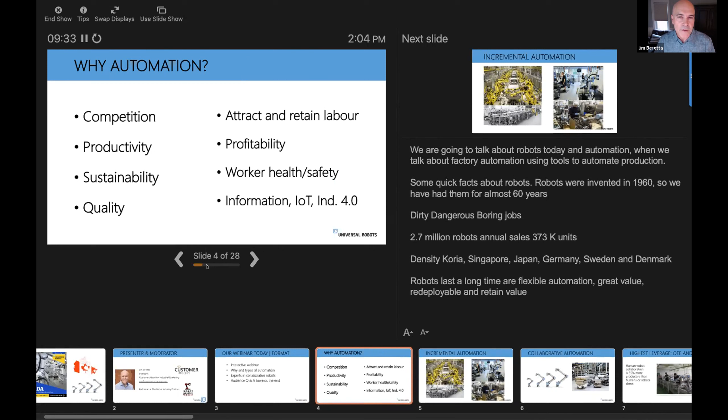One of the conversations that I'm having recently with a lot of clients and in the industry is about attracting and retaining labor. And we're going to talk about this as kind of a current theme through the presentation.

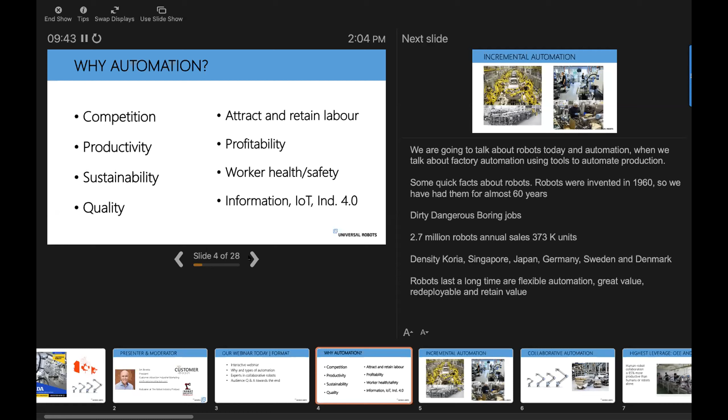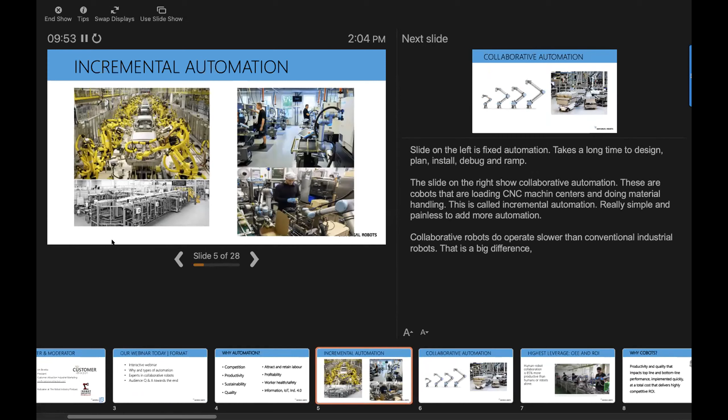Hi, Jim, sorry to interrupt. I just want to let you know that your view, we're seeing the notes screen. So if you just want to change to slideshow, we should all be able to see the slide. Okay, thank you for that. I'm seeing the other one, so I am. If you just go to swap, maybe swap displays, it could be that. Swap displays is how we're going to do this.

Yes, thank you, perfect. Great, so we're going to skip ahead a couple of slides. And this next slide that I'm going to show you, the slide on the left, this slide's about incremental automation. It takes a long time to design, plan, debug and ramp hard automation. It takes a long time to design it, it takes a long time to install it. So that's the slide on the left.

The slide on the right is showing lean automation or collaborative automation. These are pictures of robots that are loading CNC machines, and the one at the bottom looks like it's doing a material handling job. When we're talking about incremental automation, the interesting thing about collaborative technologies is that it's very simple to add more automation.

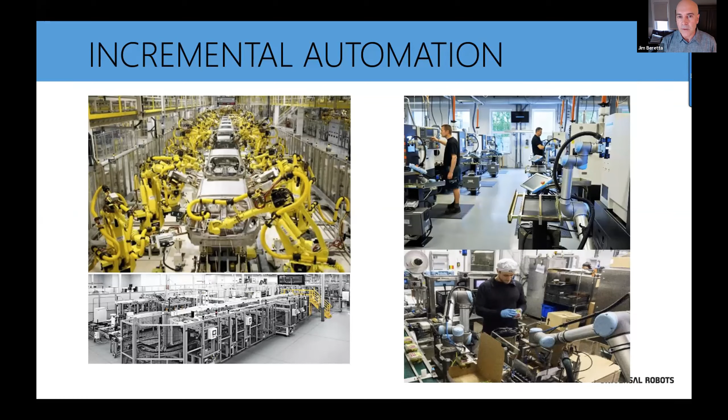So you just add it when you need it. If you have another CNC machine, you can add another collaborative robot. And this is in days and weeks, not months and months, which is on the left-hand side of your screen.

So here's two examples of collaborative automation. On the left-hand side are Universal Robots robots. They're simple, they're elegant, they're easy to use, and they're divided usually by reach and by weight.

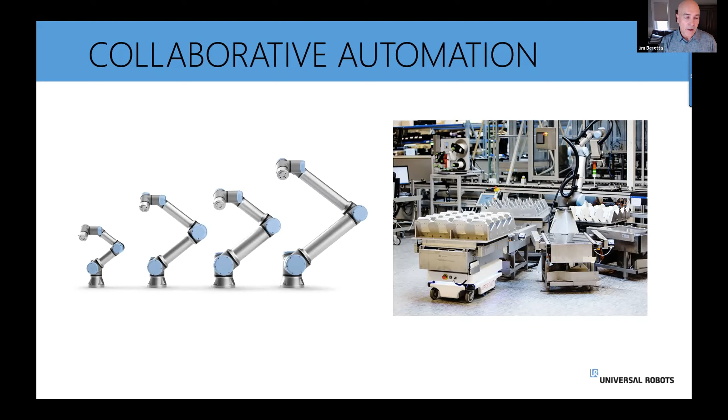On the right-hand side of the screen, you're seeing another example of collaborative automation. It's called a MiR collaborative robot. It's autonomous, meaning that it moves on its own. It knows its surroundings, it can navigate around, say, a person or a forklift in front of it. If the robots ever bump into people, they stop and slow down, and you reset them so that they can go on their way and do the rest of the tasks that they're meant to do.

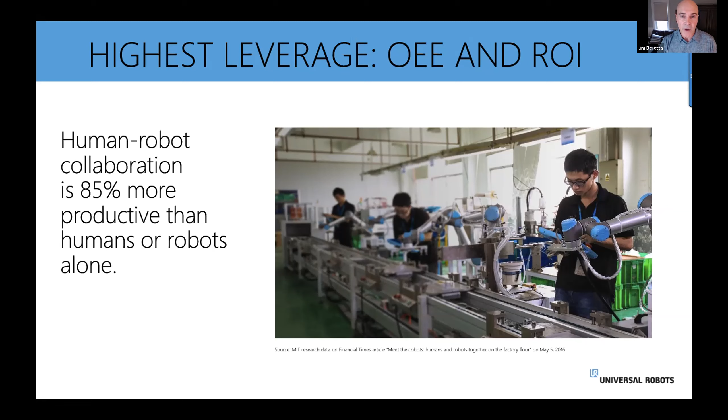One of the very interesting statistics of late is that robots and people actually work better together. You may have heard of Elon Musk in one of his Tesla factories actually pulling out automation because he put in too much automation. So the number I want you to take away from this is from MIT research data showing that collaborative robots are 85% more productive than just robots or humans alone.

So to me, the value proposition of collaborative technology is speed. It's time to market, time to install. You can use it in a do-it-yourself environment, and we'll talk a little more about that today. You have plug and play peripherals that are already pre-authorized. You have less guarding and less training.

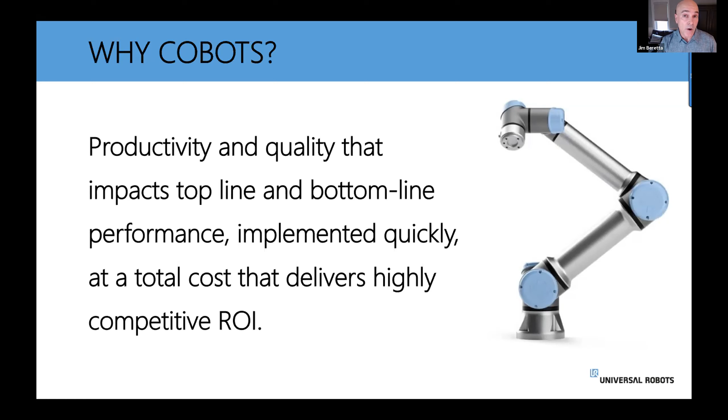And as we talk through the webinar today, you'll be able to see how this is a real advantage for small, medium enterprises in manufacturing, distribution, and material handling.

One of the interesting things about collaborative technologies is that UR is by far the leader in all the collaborative robot technologies, with over 50,000 robots shipped - and that number is from a while ago, so it's probably a little higher now. They have approximately 50 to 60% of the market share, depending on when you're talking to them. But they're in almost every industry, and it's hard to think of an application that a cobot isn't able to do.

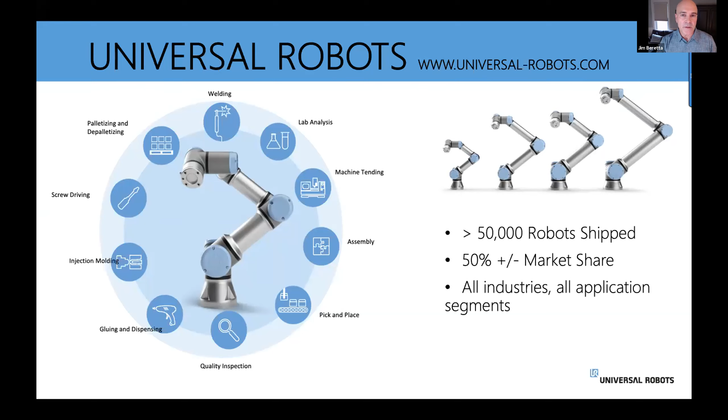So here's some things to think about when we're thinking about robots 101 with collaborative robots. They're safe, and they're intrinsically safe, so that you can work beside them.

They're easy to program. So what's interesting we're seeing in the industry is that when cobots are installed, your operator turns into maybe a robot programmer. So they're able to not do the dull, dangerous, and drudgery work that robots are meant to do. They actually become an owner of the process and learn a very valuable skill.

They're fast setup, so it's 120 volt power, simply out of the box. You can plug it in and start working with your robot right away.

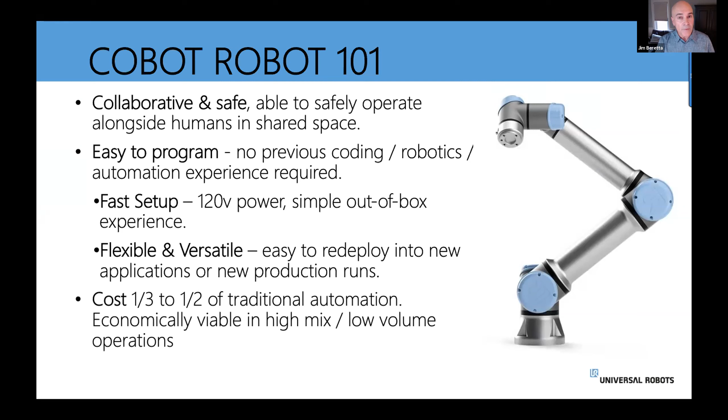One of the big drivers behind collaborative robots is that when you compare them to industrial robots, they're a third to half the price of traditional hard automation. Now, they work a little slower because they're collaborative, but they won't hurt you, which is a big advantage.

I want to also introduce to the audience today the whole concept of robots as a tool. So the low-hanging fruit of collaborative robots tends to be in machine shops, tends to be in metal fabricators, tends to be in loading and unloading machine tools.

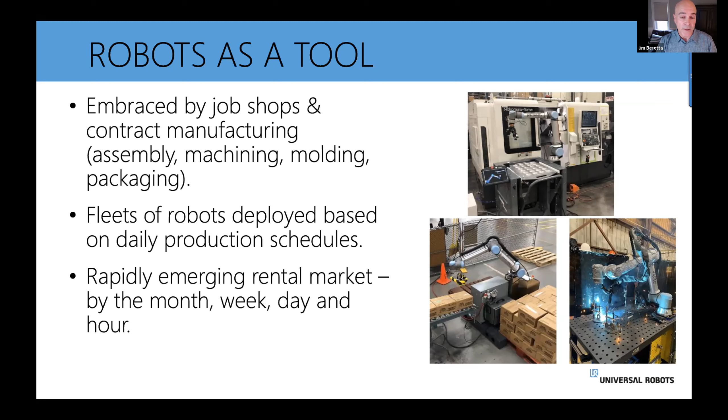But we're seeing more and more where collaborative robots are being rolled out to factories in many different ways. Some of these are robots as a service, or as the bottom right-hand picture shows, a Vectis robot. They're one of the solutions providers that's part of the UR Plus store, which is like the app store, where they're making a complete kit so you can get up and going right away.

So, you know, when we go from working from home and your employer calls and says, no, I want you to come to the office, I believe that there's going to be, and from this very informal poll, which went to, I think, 1,000 votes, a percentage of the population who are just not going back to work. So I wanted to talk a little bit about that, and I'll introduce a couple of case stories in just a moment before I get to our experts.

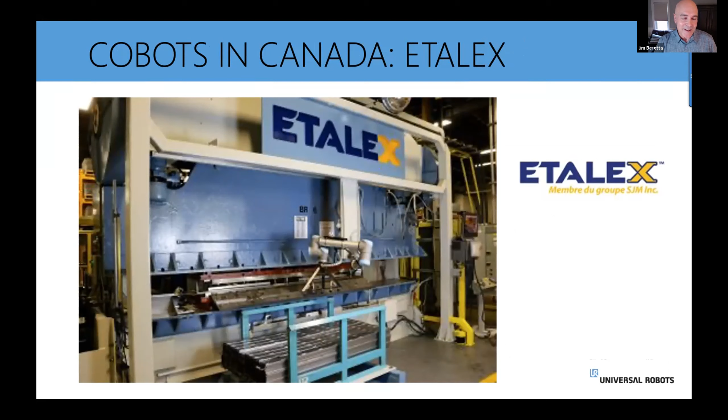So Etalex is a shelf manufacturer in Quebec, and I'll roll a video in just a moment, but we'll talk a little bit about some of the challenges that Etalex had when they installed a collaborative robot, and that's a brake press behind it, which is a very dangerous machine because it doesn't stop for anything, and it's a perfect application for a collaborative robot.

And the last is Paradigm Speakers in Toronto. Paradigm was looking for an application where they could do sanding and finishing, reduce their labor, and allow their workers to do higher order tasks. And all of these summaries are on the Universal Robots website.

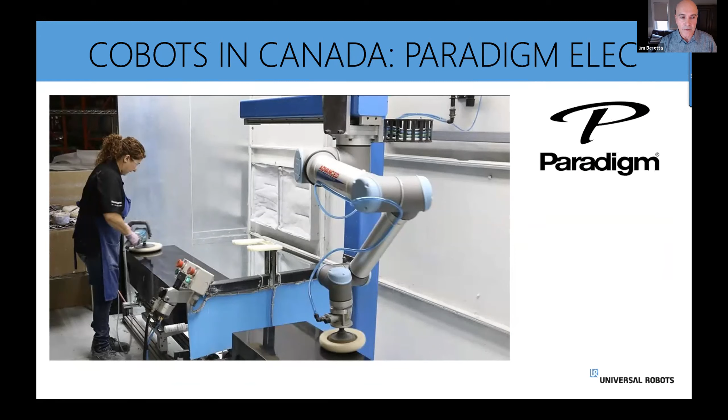And the last is a Canadian technology producer of surgical tools, and they've actually implemented a UR cobot in their tools so that they can hold the microscope for surgery. So there's a lot of people doing a lot of things in Canada with Universal Robots and Universal Robot technologies.

So I'd like to introduce Matt White. He's the application specialist for Skeens Pneumatic and Automation Solutions. He's been working in the industry for 3 years, evaluating robot applications, sales, service, and training. And he's here to join us, as well as Bryce Flug, who is the general manager of JS Foster, the manufacturer of Islander Reels, and his passion is in manufacturing, designing, testing, and fixing systems.

This passion started from a pair of startup projects in the mechanical and electrical space. It grew through experience in machining and manufacturing, and has evolved into his current management role, where he designs and implements systems that allow for sustained corporate growth at JS. Bryce has flourished in each of these roles because of a unique combination of technical knowledge, curiosity, problem solving, and interpersonal skills. And we're thrilled to have Chad Skeens, president of his family-run business, and he's been operating this business for forever.

So welcome to the presentation, everyone. You can turn your cameras on now. Thanks, Jim. Yeah, thanks for having us, Jim.

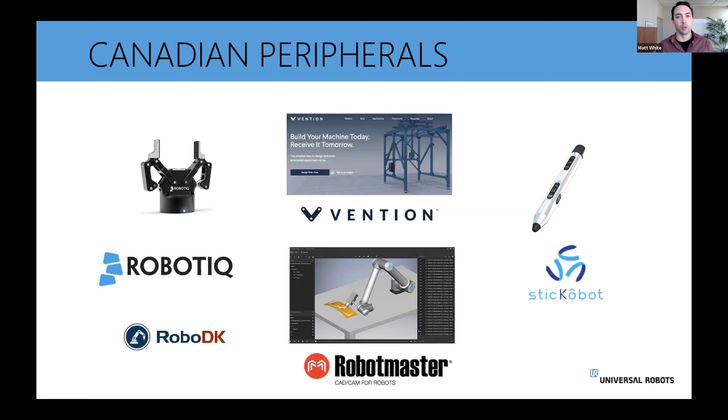So one of the things that we're talking about, and Chad and Bryce and Matt, please chip in on any of this. We are seeing a lot of different applications used in Canada. We're seeing packaging, we're seeing assembly. Chad, I think you mentioned that they're being used in hospitals. What are some of the applications you're seeing that are pretty unique?

Yeah, just touching on hospitals and medical devices, we've seen some imaging kind of usage in terms of attaching cameras and whatnot for remote monitoring patients, or even remote servicing patients from a distance or from a safe barrier. As we've seen through COVID, it might not be practical to actually work on a patient. So we're seeing a little bit of collaborative robots used in that way.

Yeah, the sanding and finishing, obviously a repetitive, repeatable process. I think we might talk a little bit later about the customer out in Toronto that is using that in an application. Woodworking, yeah, obviously sanding and the finishing, the polishing of speaker boxes and whatnot are definitely an application.

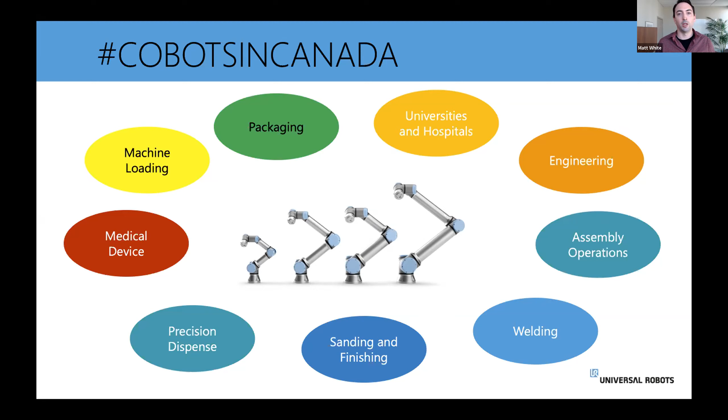So we talked a little bit about the UR Plus App Store, and I think it really is just these application kits that make it really, really fast and easy, tested, validated, and certified by UR. So they save end customers time and money, and really de-risk. So there's 3 main pillars to this, right? It's plug and play in electrical and mechanical. They've got software and the documentation as well, which is really easy to go in. And we're going to talk about that towards the end of the presentation.

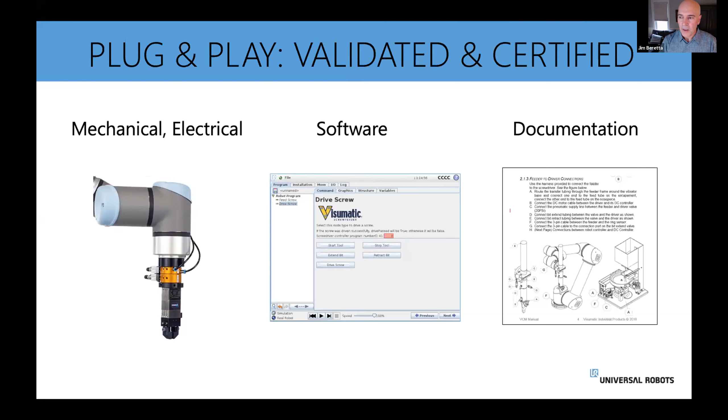But I did want to get Matt and Bryce and Chad to talk a little bit about the application kit experience and kind of what is an application kit and what that means for you, and how does that save time and money. So Bryce, I'll pull you in for this one first.

Sure, yeah. So I don't have the experience and expertise of all of them like Matt would have, but I definitely have used the one that came with ours, and that was the machine tending kit from Robotiq. When we bought the grippers with the dual gripper, it included the kit for their software, and for exactly what we're doing, which is machine tending, it's got it all figured out.

So one way that we did it, if you've ever loaded a machine before by hand, you'll realize you like to push it while it centers and make sure that it seats just right. Well, because they're collaborative robots and have force sensing, you can also utilize that force for what you want to do. So we actually pushed the blank into the chuck with the same force. We calculated roughly what a person pushes it in with and did that.

I'm sure that you could do that through code or something like that, but it came with an app that just did that. So it was just as simple as adding that extra little line of code from the application into our program. We also built a table to drop our parts off ourselves. We might upgrade it in the future, but for now it's a pretty simple table.

It's not perfectly flat. So when we go to pick a part up, we actually have it sense when it gets to the part and then grab it, versus just blindly going to a coordinate that may or may not be perfect because it's not flat and then introduce some sort of a problem. And those were all things that came in our Robotiq machine tending kit, the finding surface features and those sorts of things, and they sped it up big time for us.

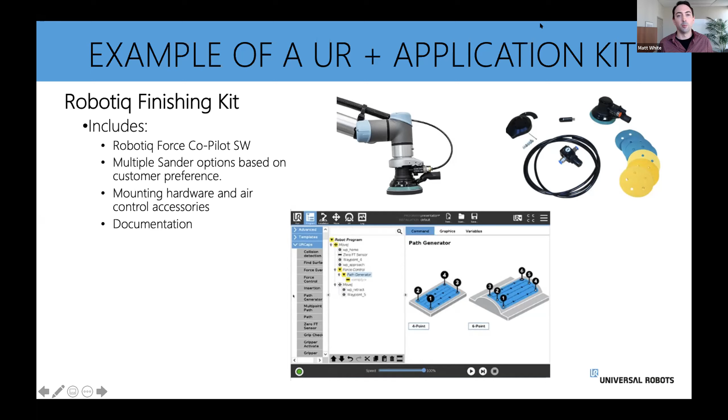Thank you for this. We're going to just stop the presentation for a moment, and I'm going to show you a quick video of an application. And let me know if you can see this okay, because I can't see what you see.

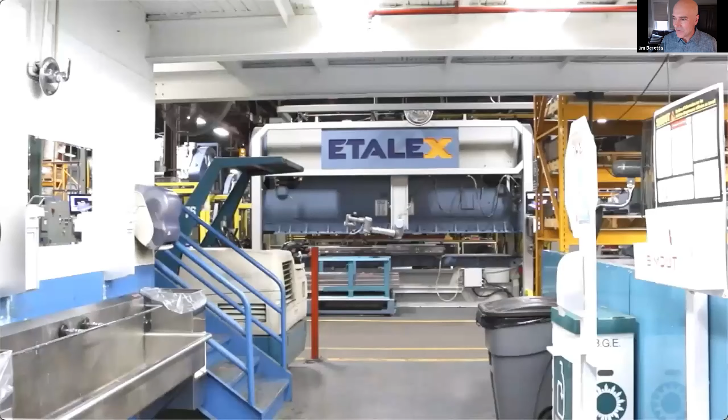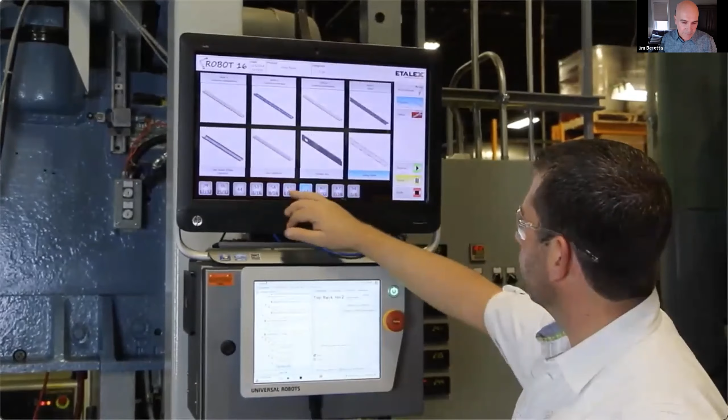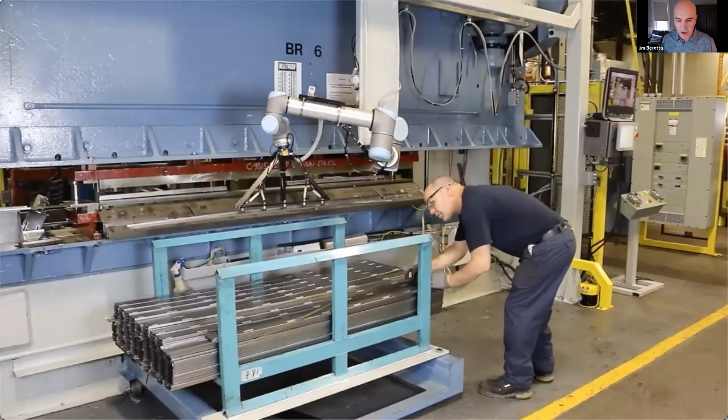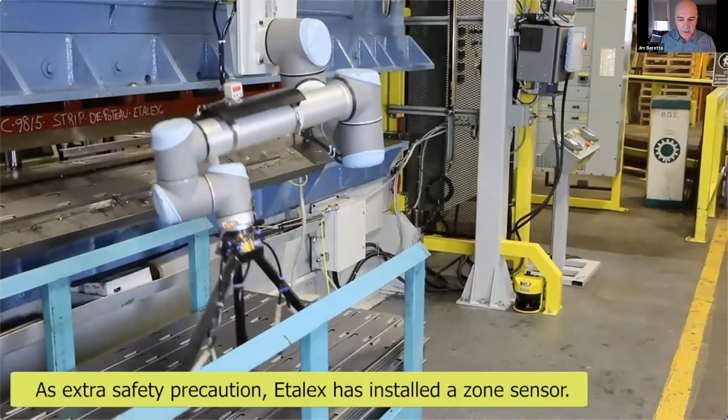Automation was about safety. It was about being efficient. There were no layoffs, and they were able to pay back the robot in less than 12 months. You can see at the bottom right-hand side that there's a yellow sensor. It's a SICK motion sensor. You can see it just is activated. If somebody comes near the cell, it slows the robot to 20% of speed.

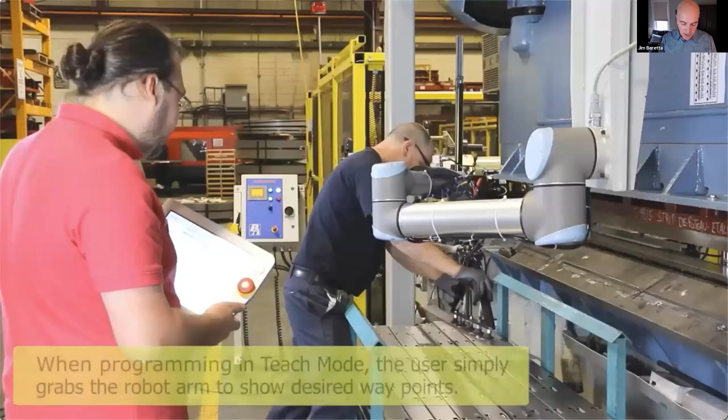So for them, it was time, it was money, and it was competitive pressures that allowed them to install a robot and have it save on their labor costs, but also made them more competitive in the industry. And you can see this on Universal Robots case studies. So I'm going to open back up my PowerPoint. So just while you're doing that, you can see that that same package would have tool changers, would have safety sensors, all from the UR Plus platform, all tied back into that system.

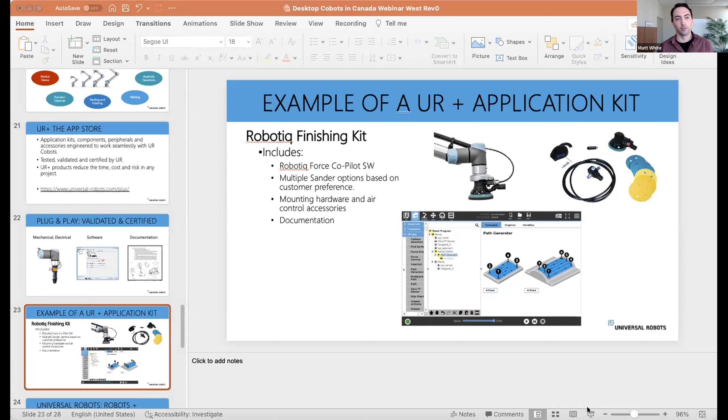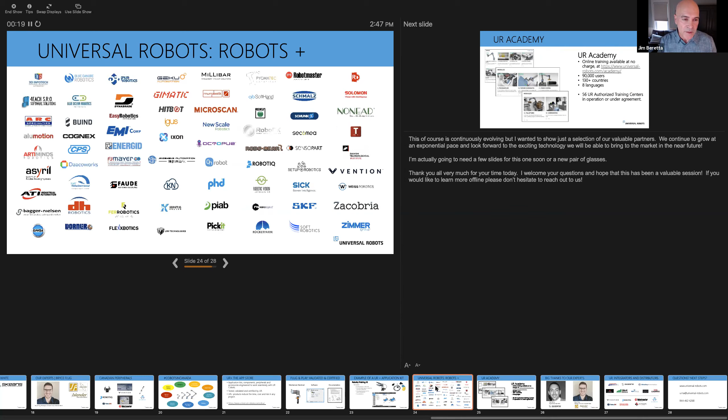So one of the things I wanted to also show our audience today is the Universal Robots UR Plus store. So this is just a small glimpse. There's, I think, around 250 or 300 different applications and hardware pieces that you can add to a robot. But I did want to talk before we end.

Jim, sorry again to interrupt. We've got the presenter or the notes mode again, if you just want to swap your display. Okay. Thank you.

Am I on the right slide?

No, I'm not. So I wanted to talk about the UR Academy. This is one of the things to like about Universal Robots. They've been very innovative with their product. They've opened their API, so any qualified, innovative company can add grippers or software. One of the other really interesting things, and a reason I think collaborative robots are great for the Canadian market, is their UR Academy—it's online training available at no charge.

And Bryce, you can talk to this a little bit, right? Before you do, could you just swap displays on your screen? It should come up, let me swap displays. Sorry about that. That's okay, thank you for that.

So I'll ask Bryce. To be honest, we didn't really have to use this much—our application was quite simple. The UR applications that came with it were easy to use, and we had it running in a day or two, so I didn't have to use this too much. Maybe Matt has more experience with it.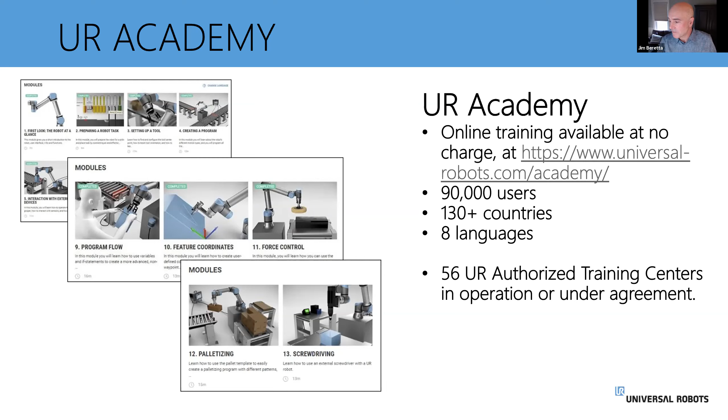One of the really interesting things about UR Academy, which speaks to UR's leadership position, is that it's free—no charge to learn about the robots. It's in multiple languages, and it's all over the world. You can go from an operator to a robot programmer in just a couple of hours on UR Academy. That's another pillar thing I really like about Universal Robots. The simulator is there as well, so between UR Academy and the UR simulator, both free of charge, you can become very competent with one of these units without ever actually putting your hands on a physical unit, getting you and your team prepared.